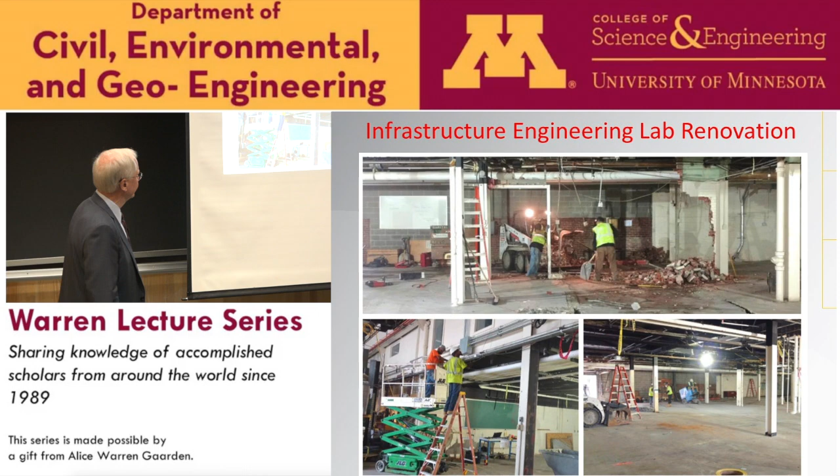And the problem was not only were they old and deteriorated, but they were becoming a choke point in our program in that we have roughly 200 students that have to go through there every year, and we couldn't run that many through. It was becoming an impediment to graduation, and so we had to do something about it. Plus, we were looking at accreditation this year, and I thought, what could be better than to tear up our labs just before the accreditation visitors come? So anyway, we demolished everything, and it's going to look great when it's done. This simply shows that architects have absolutely no idea what goes on inside of a materials and soils laboratory.

But it's actually going to be fairly dramatic space with curved glass walls and all sorts of neat stuff. It'll be named after, we're lucky in that we have two of the top 10 construction companies in the Baltimore and Washington area. And the one in Baltimore is Whiting Turner Contracting, and so they provided the leadership pledge for this. And so they get naming rights for the laboratory. So this should come online for classes again in the fall of 18.

Another big recent development is literally for decades we had been trying to get a Maryland Transportation Institute, a multidisciplinary center that would unify all of the transportation research going on campus, a lot of which goes on in the civil engineering department. And this is a very busy slide, but it sort of gives you an idea of the strength of our program that sort of motivated us to do this.

Nobody ranks transportation programs separately, but if you look at things like journal publications and funding and so on, we end up very well. We actually have two big transportation components at Maryland. One is our regular tenure and tenure track, the research faculty, which are very active. And then we have a separate Center for Advanced Transportation Technology, which doesn't do so much in terms of basic research, but provides advanced operational support for the region and for the country. Among other things, they manage the entire I-95 corridor from Florida up to Maine.

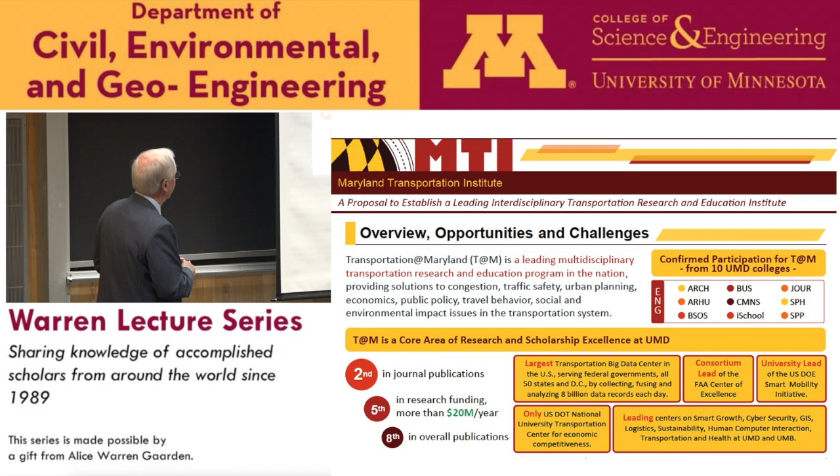And part of the Center for Advanced Transportation Technology is what's called the CATT Laboratory, which basically collects and archives transportation data. And today they are collecting and archiving 8 billion records of transportation data every single day. And they've done great stuff in terms of data visualization tools for looking at this data. All kinds of people, Google comes to us asking for our data. So it's a huge resource, and that's one of the things we want to capitalize on in this Maryland Transportation Institute. But again, you can see some of the areas that we want to get prominence in.

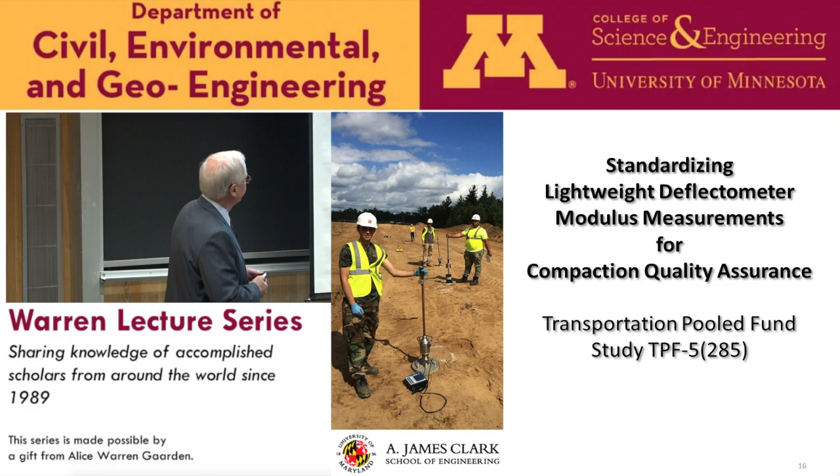non-nuclear or deflection-based quality control for compaction forever. You know, they decided from the very start they didn't want to get into the nuclear gauge business and have gone a different route. And so we're following along. It's a pooled fund study. You can see the states here that were involved.

Minnesota and Indiana are green because they were not formal members of the pooled fund study, but since they had been doing so much work in this area, they became sort of informal members of the pooled fund study and participated in all of the technical advisory committee discussions and so on. John Siekmeier from MnDOT here was extremely instrumental in setting up this pooled fund study and in helping us to make it a success.

But what's the objective? Okay, we're looking at compaction control. Any geotech students here? How do most places do compaction quality control? For, you know, you're going out and you're compacting an embankment. How do you determine whether it's compacted enough? Sand cone? Sand cone.

We use nuclear density gauges, right? We take a nuclear tip probe and put it in the ground, and the attenuation of the radioactivity gives us an indirect measurement of density and moisture content. Okay, and we do that for pavement engineering. Okay, and so the question is this: what are the inputs for our pavement design procedures? Is density an input for our pavement design procedures?

No. Is it an input for embankment design? No. What are the inputs? Are there things like stiffness and strength? Okay, and so the question is, well, why don't I measure stiffness and strength? And the answer is, it's a lot harder to measure those in situ. It's easier to measure density using a nuclear density gauge.

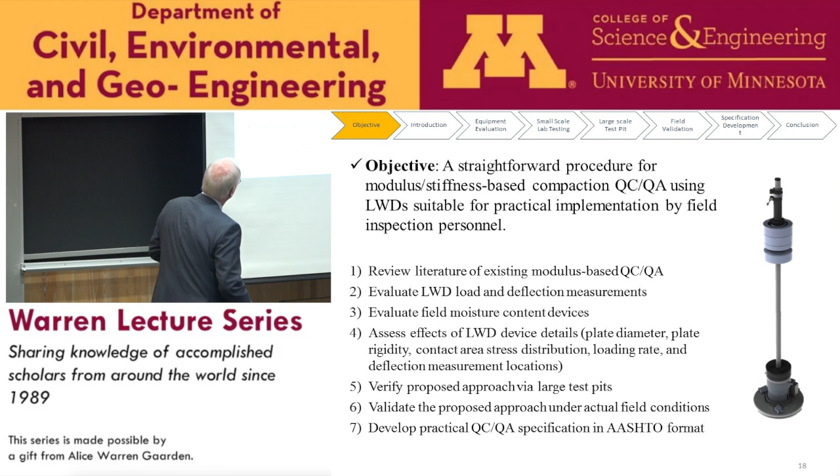We wanted something simple. People have been using lightweight deflectometers for a long time in a research mode, but except for places like Minnesota and Indiana, they had never really quite made it to practical acceptance. And so we had a whole bunch of tasks, the standard kind of research tasks you would have in a project. But to cut to the chase, to give you an idea of where we're going, we were looking at coming up with two specifications at the end of this. Specifications in AASHTO format that could be the basis for a real field inspection program using these devices.

And so the first one is a draft specification for how you do this in the field. How you go out and use an LWD in the field, a lightweight deflectometer. And again, a lightweight deflectometer is nothing more than a drop weight with a sensor that measures deflections. So it's like the big falling weight deflectometers that are used commonly in pavements, only at a much smaller scale. So it's a load and deflection measuring device. Sort of a dynamic plate load test. It's another way to think of it.

So we wanted to come up with a draft specification for field compaction control using stiffness instead of density. And a lot of this looks kind of familiar. We want to test within a couple hours of placement. That would be the same if I were doing density-based QC testing. We want to keep the field moisture content within the optimum by a certain amount. Okay, we're used to doing that.

That doesn't change. The thing that does change, instead of looking at a percent compaction in terms of density, we're now looking at a ratio of the modulus that we measure in the field versus a target modulus that we've determined for that material in the laboratory. So that has to be greater than some threshold value, where that target modulus is going to be soil specific and also structure specific. If you're looking at pavements where you have a layered system, the depth of influence of these devices usually extends beyond one layer, and so we've got to correct for structural effects. So that was the first specification.

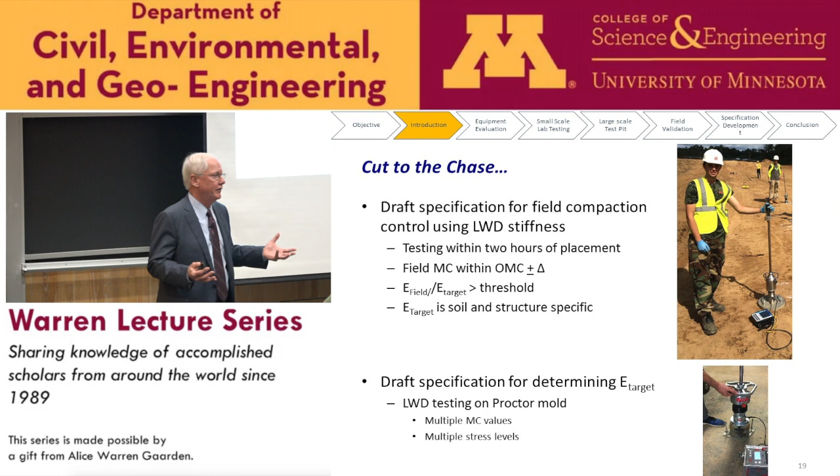And then we're going to do it at different drop heights so that we can get the stiffness at different stress levels, since for most materials the stiffness is stress dependent. So the major issues that we had to confront are basically the same major issues that everybody who's worked with lightweight deflectometers has had to deal with. There are a bunch of manufacturers of these devices. They have different operating characteristics in the way that they measure load or don't measure load, in the way they measure deflections. And the consequence is that if I have the same soil and 3 different devices, I'm going to get 3 different measurements of modulus, which is problematic.

We have to worry about moisture influences, because that's going to have a big effect on stiffness. If we don't have moisture control, and if I were a crafty contractor and I knew that you were going to be checking my compaction based on stiffness, what would I do? Well, I'd compact dry of optimum, because it's easy to get a stiff material when you compact it dry of optimum, but that's not the material I want. So you need to have some moisture control on this.

Initially we thought we'd have to worry about drying effects, between the moisture content at the time of compaction and the moisture content at the time that you actually did the test. But in the end, we said, well, no, look, if this is going to be a quality control test, you've got to do it quickly. You're going to have to do it within 2 hours of placement, and you don't get much drying going on in that short of a time period.

Stress level I mentioned. Finite layer thickness. If it's a pavement system and I'm doing this on top of an 8-inch granular base layer, well, I have to factor in the stiffness influence from the underlying subgrade in my measurements. And then the key thing was practicality. We wanted this to be a laboratory test that didn't impose too much additional cost and burden on the technicians in the laboratory, and also which would be easy to do in the field.

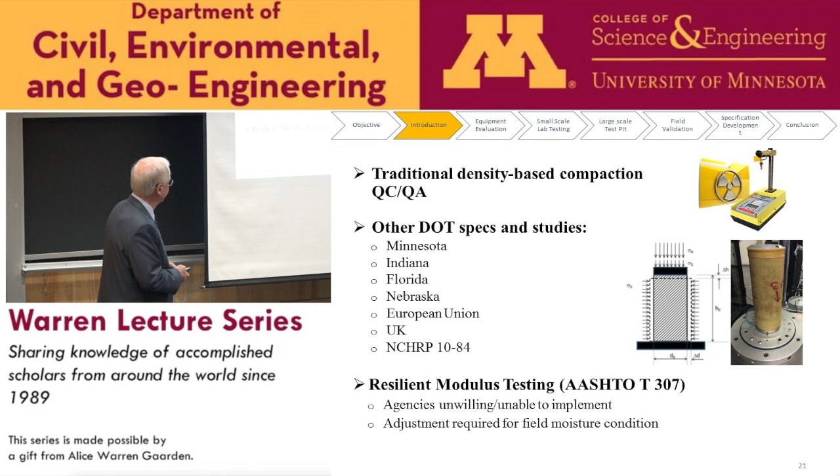The other thing that this touched on was resilient modulus testing in the laboratory, cyclic triaxial testing. Most agencies have not really been willing to implement this. They view it as too expensive and too complicated. And for this purpose, you actually have the problem that you don't know what the moisture content is going to be in the field, and you really want to test the material at the same moisture content. And so you could, in the laboratory, do resilient modulus testing over a whole range of moisture contents, but that would really be complicated and expensive and time-consuming. So we wanted to steer away from that.

And we wanted to come up with a scheme that gave us a smooth transition from our density-based methods that everybody is familiar with, that applies to a range of geomaterials, including things like cold in-place recycled materials, full depth reclamation, for example. We wanted to have consistency among testing, design, and construction. If design is based on stiffness, then we want to have our testing based on stiffness and our construction control based on stiffness also. Cost efficient.

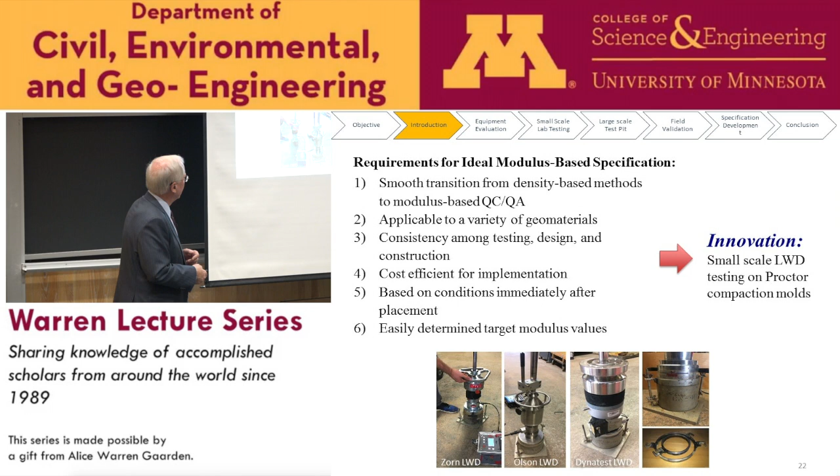Again, if we're doing it for quality control, it's got to be done right after placement. Doing quality control testing 2 days after placement doesn't help the contractor maintain quality. You've got to do it right away. And most importantly, we wanted to have an easy way of determining the target modulus values. And so again, the innovation here was to do small-scale lightweight deflectometers using a 100 millimeter diameter plate or 150 millimeter diameter plate, depending on the size of the mold, directly on the Proctor molds to get the target stiffness value that we're looking for.

So what we did is we looked at a variety of equipment. As I said, there's a bunch of manufacturers of these lightweight deflectometers, and they have different load measuring devices, different buffers and different displacement sensors. And we looked at the range and chose 3 different manufacturers that covered the whole spectrum of options available.

The Zorn, which is used here in Minnesota primarily, measures accelerations directly on the top of the plate. But it's unusual in that it doesn't have a load cell, and so it can't measure the peak load during the drop. You have to calibrate it and assume that calibrated peak load is the same for all conditions you're testing. There's a Dynatest LWD that does have a load cell and uses velocity sensors instead of accelerometers to get at deflections. And then a new one by Olson Engineering that has both a load cell and accelerometer. So it covers the whole spectrum of options that are available.

The other thing you have to have is some way of quickly determining moisture content in the field. That is one of the good things from the nuclear gauges, that they give you a direct moisture content. And if you're giving that up, you've got to find something else to replace it. And we looked at a couple of devices, but the one we really settled on, and the one that we really like, is this Ohaus moisture analyzer, where you put a little sample of material in this container, in this little cup.

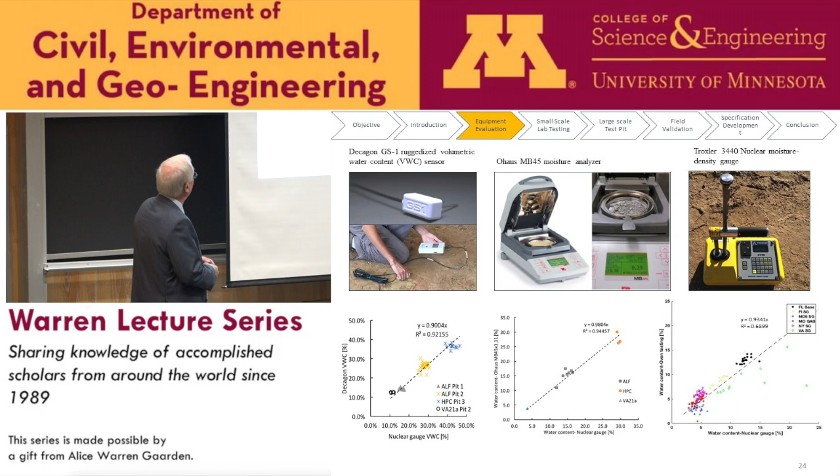We did a bunch of tests, some of them more for validating techniques, approaches and others for verifying things in the field. So as I said, we went out to the Federal Highways research center in McLean, Virginia, the Turner Fairbanks Highway Research Center, where we were going to do some large box tests in the laboratory. And the people at Turner Fairbanks said, well, you know, we have these concrete lined pits that we dug a long time ago for some research that never came about, and they just have been sitting there for a decade, empty. Why don't you use these? We said, that's fantastic.

So we went out there, and these were about 15 by 15 foot in plan, deep pits that we could construct using carefully controlled construction techniques, carefully controlled materials, and went in and basically did a full suite of tests. Gradation, classification tests, laboratory resilient modulus tests, ran all the compaction tests, and then also ran all of our LWDs, all three types of LWDs. They actually had a static plate loading frame on these pits, so we could do static plate loading tests. We did nuclear gauges. We borrowed from MnDOT a device they call their beam verification tester, so we could also test the individual LWD devices themselves.

So we did a lot of testing out there, essentially to refine our approach and to collect some preliminary data that we could use to make sure that we were on the right track. And so that worked out very well. That took basically a whole summer to construct those pits and collect all of the data.

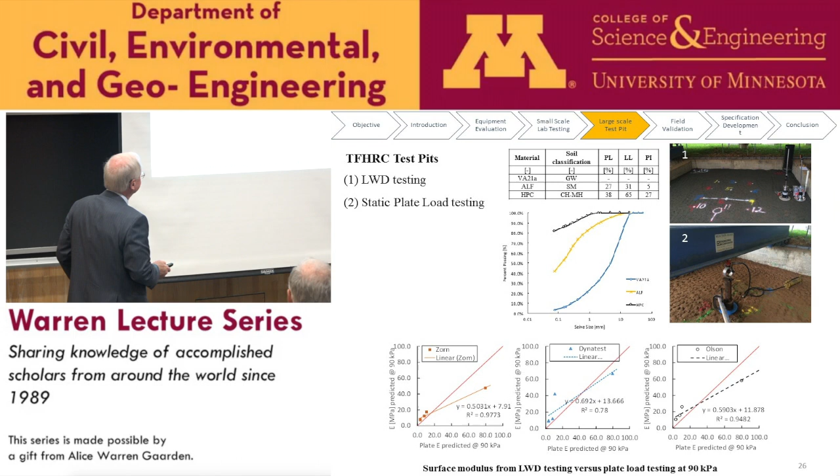It turned out that a lot of these sites didn't work out for verification purposes, in that when we would get there, we found out that they had placed the material 3 days ago, and so it violated our window for the specification. If you're testing a granular base layer, what you want to do is to be able to go in and test the subgrade before you place the granular base, so you know the stiffness of the layer that you're putting the material on. And sometimes we got out there and found they already covered the subgrade.

And so, you know, we visited a lot of sites, we learned a lot, but when we were all done, there were only about 5 or 6 of these that actually gave us the data we were looking for. But at each one of the sites, we would record weather data. We would lay out a testing plan, sort of a grid. And in each grid, we would do the 3 lightweight deflectometers and a nuclear density gauge. We collect samples for field moisture content measurement. We collect samples to take back to the laboratory for laboratory testing.

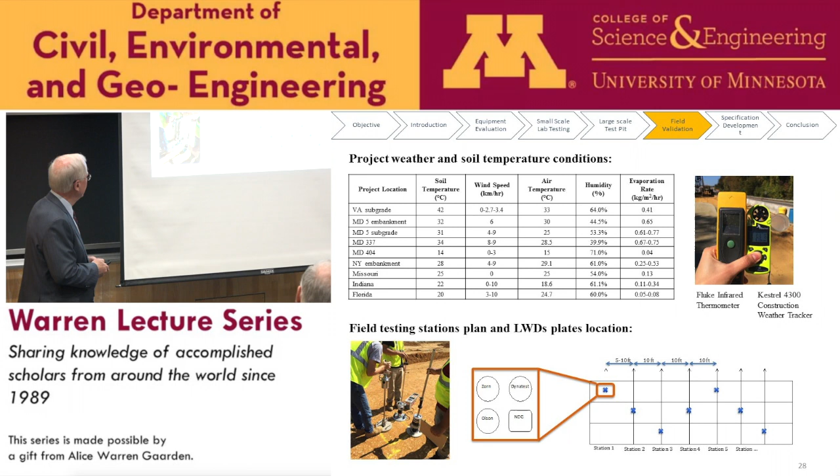But again, the methodology that we developed and refined through this field verification process is in the laboratory using the Proctor mold and a small diameter plate to do lightweight deflectometer drops directly on the mold. And what that allowed us to do is to not only develop a density versus moisture content curve, the standard Proctor compaction curve here, but also a stiffness versus moisture content curve shown here in the green. And we would do that for different drop heights, and so we would actually get a family of these curves depending on different drop heights, and we'd fit a regression to that to allow us to calculate modulus as a function of moisture content and stress level or drop height.

And then the next step is to go out and measure the stiffness in the field and to measure the moisture content in the field. And then our compaction criteria were that the ratio of the stiffness in the field to the target had to be greater than some threshold, and the moisture content at compaction had to be within optimum plus or minus whatever the tolerance was for the specification.

So again, a very simple specification, a very simple approach that builds directly on the way we are used to doing things, doesn't introduce a whole lot of new wrinkles. And again, the reason for that is to try to make this implementable. We wanted it actually to get used in the field.

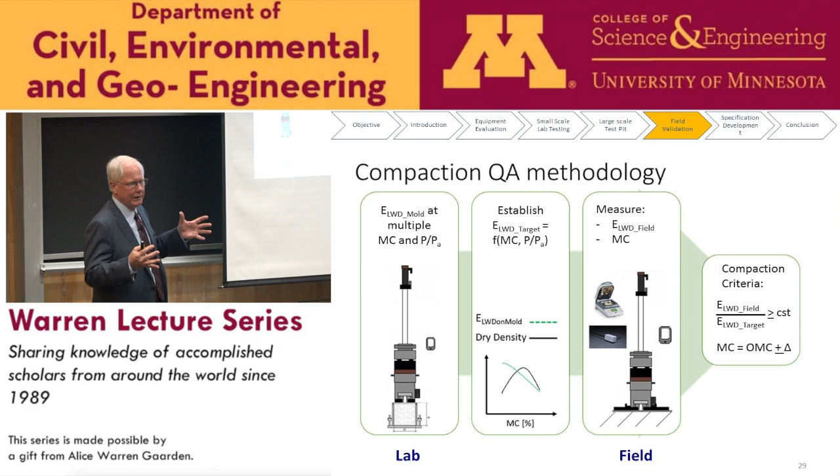Again, just a little bit on the background. So the LWD drops on the Proctor mold. Just basic theory of elasticity, don't need to go through the details. But again, in the field, typically we're using a 300 millimeter diameter plate in a full drop height, and the stress conditions in the field are different.

When we're dropping it on the Proctor mold, we've got a confined specimen. It's only 100 or 150 millimeters in diameter, and so the full drop height gives us stress levels in the mold that far exceed what we see in the field, and so that's the reason for going to partial height drops, so that we can interpolate to get the right stress levels for comparing with the field.

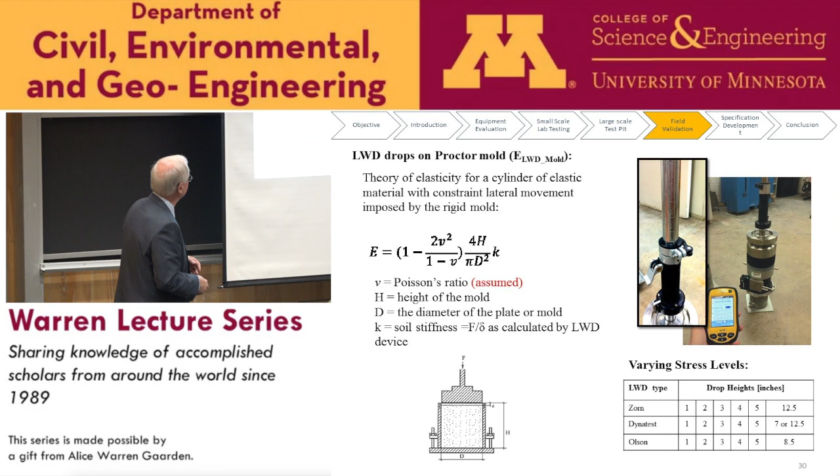And in the process of doing this, we developed a whole bunch of refinements to how you do the LWD drops on the Proctor molds, and came up with a bunch of guidelines here that got built into the specification for actually doing the tests.

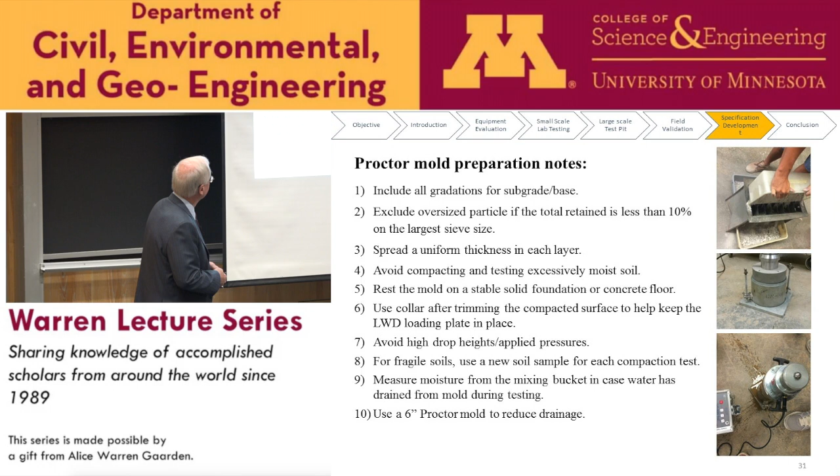And in the field, again, this is just basically your standard Boussinesq equation if it's a subgrade you're testing on. So the standard Boussinesq equation with some wrinkles here: in all of these elasticity equations, you have to have a Poisson's ratio, which we typically have to assume. We're not going to measure that. And then there's always this issue below foundations. What's the stress distribution below foundations? Is it a uniform contact pressure? Is it a parabolic or an inverse parabolic? And it depends on the soil type, typically.

And so there's this stress distribution factor A, which we get based on the stress distribution shape here. And then basically we've got the peak load and the peak measured deflection. And we use that all factored in here to back out the field modulus.

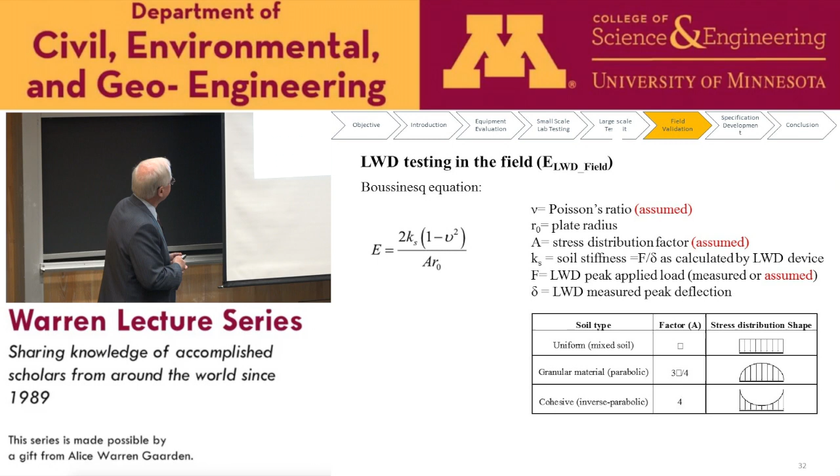It gets a little bit more complicated if we're dealing with a layered system. What I showed there is if I'm testing directly on the subgrade, so I've just got a homogeneous single layer. If I'm testing on the top of my granular base layer, since the subgrade is typically within the zone of influence of the load, the stiffness of that subgrade is going to influence what I measure on the surface. And what I'm measuring is a surface modulus.

So if I know the surface modulus and I know the stiffness of the subgrade, I can combine those two to back out what the real stiffness is for this granular base layer. And this is just a technique for doing that. It's a correction factor basically based on the structure of the layered system.

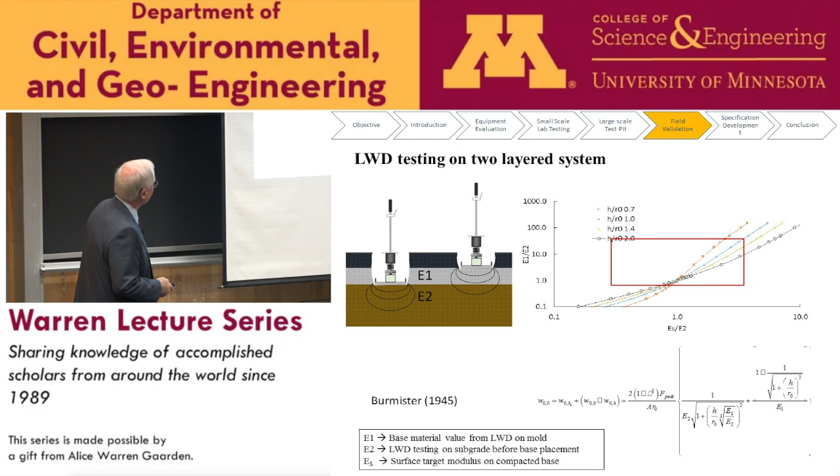So what we were finally after at the end in the field validation is a series of plots that look like this, and again, this is very small. I think the battery's dead on this. The vertical axis on these plots is the percent compaction that we get from density. A typical compaction spec would be you have to achieve 95% of standard Proctor compaction in the field. So that's what we're plotting on the vertical axis, percent compaction.

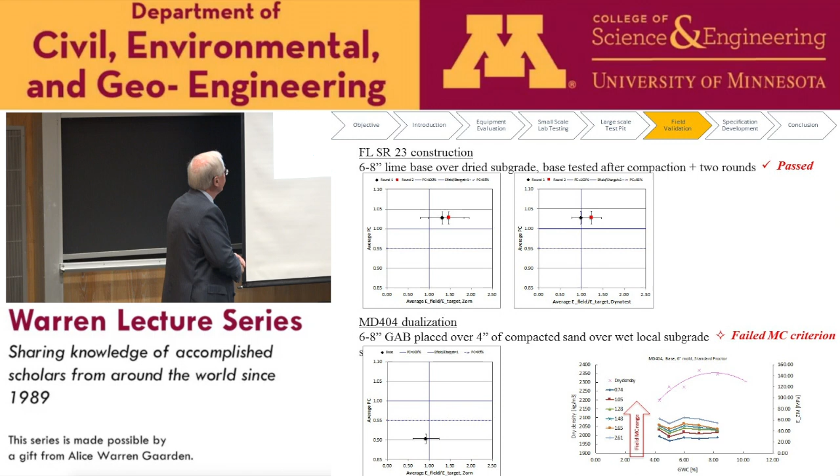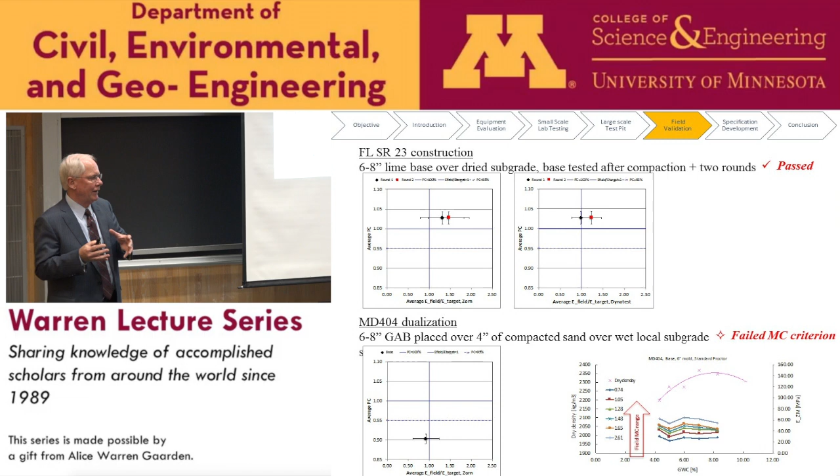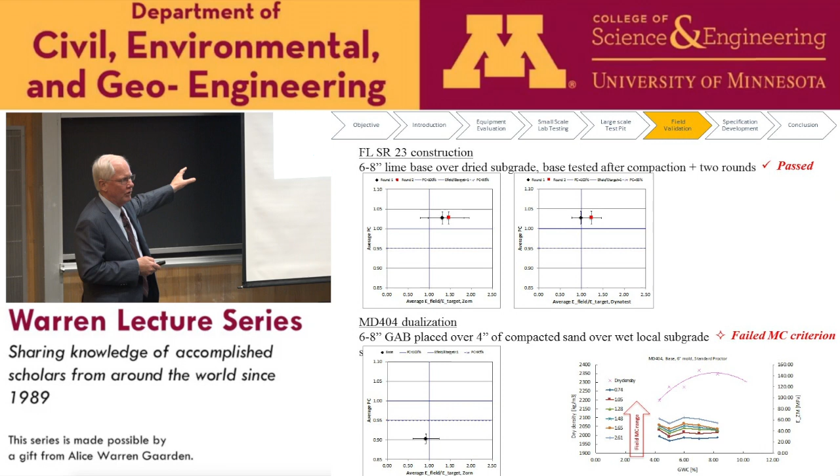So again, the point of this was, in the conventional way, if we would have said that this site passed the compaction requirements based on density, would we also say it passed based on stiffness using these specifications we developed? And the answer is yes, for a limited number of sites. For all the sites we looked at, a lot of them we had to reject because they didn't meet all the requirements of the specification by the time we had refined it. And so we were able to come up with a bunch of recommended target values for these materials.

And at the end came up with these 2 proposed specifications. One for how to do the laboratory determination of the target modulus, how you prepare the sample, how you do the testing, et cetera. And then the second one is how you go about doing this in the field. And that includes things like the required testing frequency that you should have for your testing program.

And so the next step for implementation is for individual agencies to go out and do some local calibration of this. And the argument for this is as follows. When we do density-based compaction control, we don't require that you compact in the field to densities equal to 100% of maximum dry density. Typically, agencies will specify 95%, 93%, whatever. And so the question is why? Why not 100%? Well, it's a question of what you can achieve practically and economically in the field. And this is something that evolved over time through experience.

Well, we have to do the same sort of thing for the stiffness ratio. We don't necessarily want to require a stiffness ratio of 1 or greater, in the same way that we don't require density equal to max density or greater. We probably want to set that compaction specification threshold as something a little bit less than 1, again, to be practically achievable in the field.